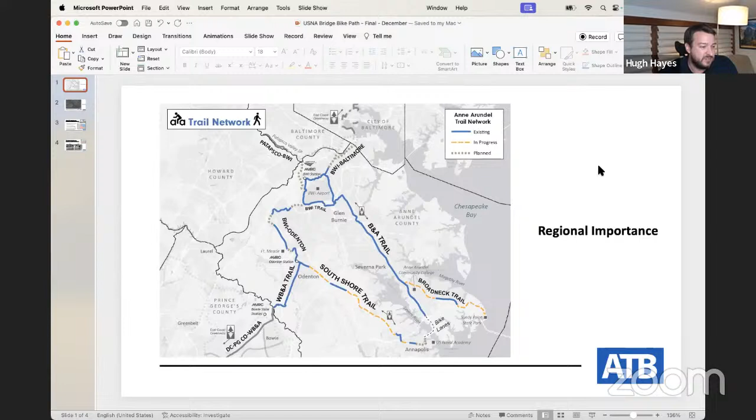Regionally, you've probably seen this map before by Bike AAA, showing the Anne Arundel County Trail Network, what exists today, what's in progress, and what's planned. In a couple years, pretty much this whole map will be done, with a separated shared use trail from Annapolis to Baltimore, or Annapolis to Odenton, and down all the way to Washington, D.C. The only problem is that bottom right corner near Annapolis, where it's just a dashed line showing bike lanes, which is what we're going to talk about today.

Why this is so important locally is that Annapolis is investing in a bike network, and this 450 segment really ties into almost everything Annapolis is doing. From the 450 segment, there's a section of trail going from here to the Naval Academy Stadium, then the College Creek connector off the 450 segment that takes you into downtown. From there, the West East Express trail will take you from Odenton to Parole, and all the way to Washington, D.C.

Annapolis is very close to the B&A trail, but today it's very hard to get to the actual B&A trail safely. Thankfully, Anne Arundel County is planning a shared use path on the east side of the bridge that will connect where the terminus is today. The Navy is also thinking about doing something at the 648 segment, connecting their base on the other side of the Severn River to the Naval Academy.

So from the regional to the local, this segment of the 450 is vitally important to everything we're doing, and it would be a huge missing link if it wasn't there.

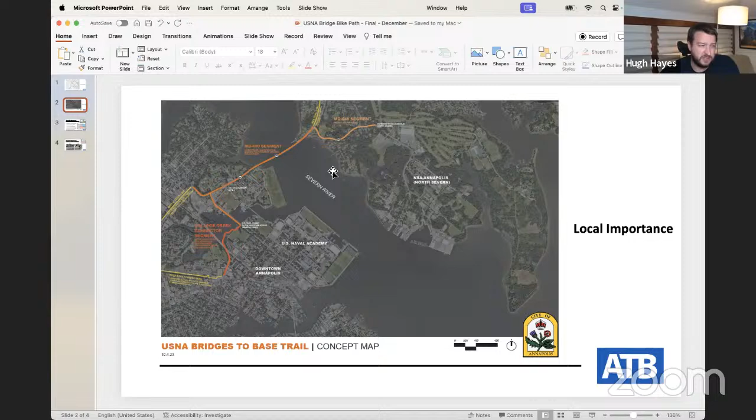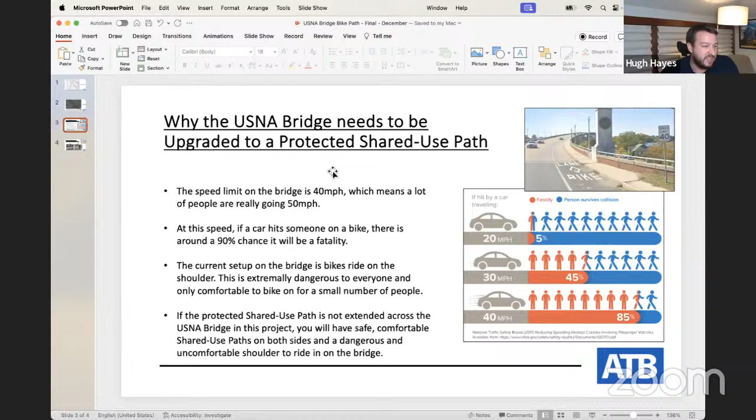The two things we were looking for in this project were: one, that the scope included the bridge itself, and two, because of the 40 mile an hour speed limit on the bridge, that it be a protected shared use path. According to the National Traffic Safety Board, at 40 miles per hour there's an 85% chance of fatality in a crash, and there are downhill sections where people likely go even faster. So we don't believe flex posts alone would provide enough protection from a car veering off the road into the bike lane, which would most likely result in a fatality.

So the second thing we were looking for, besides the scope including the bridge itself, was something with a higher level of protection, a hardened barrier, something like in this picture, a sort of tall curb.

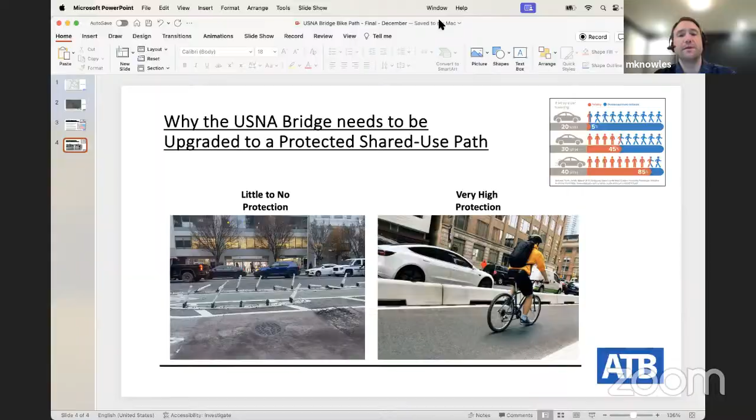Yeah, sure, I'll touch on all those things you're asking for, and we'll definitely have time for questions afterward. I'm Matt Knowles, I'm with SHA, the project manager for this project. I'm joined by Luis Gonzalez, who's the assistant division chief for ICD.

Give me a second here, and I will share my screen. Luis, is there anything you want to say before I pull this up, or are you pretty good?

Hi everyone, I'm Luis Gonzalez, Assistant Division Chief for the Innovative Contracting Division and Fund Manager for Fund 88, which this project is under. To us this is a pretty important project, and we've been investing a lot of resources on it.

I believe Zoe talked about this project in one of your last meetings. We are just trying to make sure we provide the safest accommodations we can within the constraints we have. We're not saying any ideas are bad. We want to put in as much of the safest infrastructure as we can, but we're also constrained by what's existing out there. I'll let Matt present what we're able to do so far, but overall I want to make sure everyone understands we're all working toward the same goal: to provide safe infrastructure for everyone.

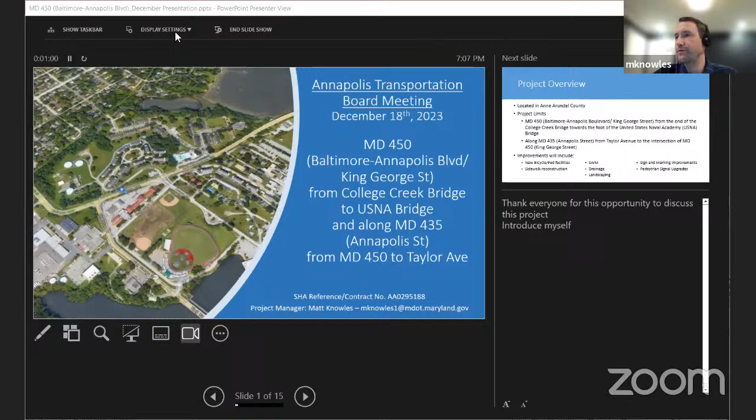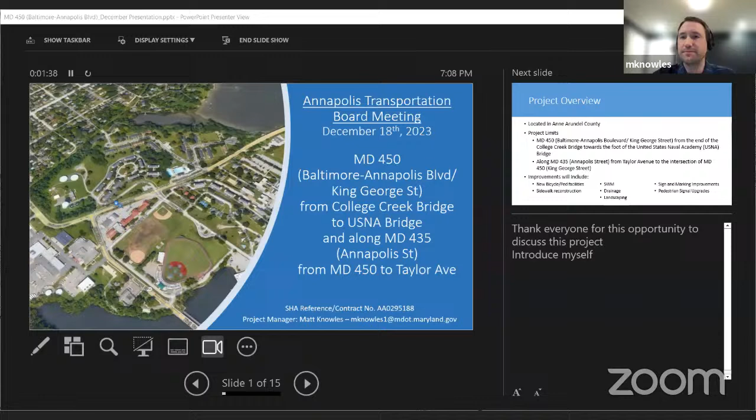Just trying to figure out if I'm sharing the right screen, if I need to switch them. Do you guys see it now? Yeah, your title slide's up, Matt. Give me one second, sorry, I'm used to Teams, not Zoom. Can you full screen it? Let me check the display settings, swap the screens. There you go, is it working now? Yeah, but can you full screen it? How about now? Yeah, that's great. All right, sorry about that.

So you can see it's the Maryland 450 project, from the College Creek Bridge to the U.S. Naval Academy Bridge. There's also a section along Maryland 435, from King George Street to Taylor Avenue. Taylor Ave is right there if anybody's not familiar, and King George Street is here. So here's a little section of 435 that's also part of this project.

As I said, I'm Matt Knowles. My email is at the bottom of this slide. If anybody has any questions afterwards, feel free to shoot me an email.

So, project overview: this is in Anne Arundel County, and we just went over the project limits. I want to touch on this — these are the approved limits thus far. We'll talk about some options for including the Naval Academy Bridge, as well as some improvements to the College Creek Bridge, that we'll see here shortly.

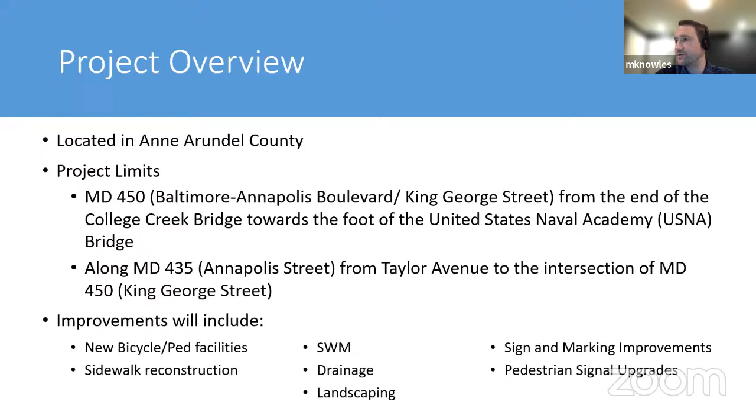Luis mentioned this falls under the programmatic objective statement for Funds 79 and 88. So what does that mean? We're trying to accommodate bicycle and ADA pedestrian facilities along this project. We want to improve existing sidewalk segments, ramps, and crosswalks in the area that don't meet ADA guidelines. We want to serve current pedestrian and cyclist demand, as well as prepare for a volume increase in the future.

We'd also hope to enhance the trail network and community connectivity — something Hugh touched on at the beginning of this meeting. Hopefully we connect Annapolis to Crownsville, Odenton, Arundel Mills, and all the surrounding areas. He also mentioned this corridor is part of a larger spine of bicycle networks, including the East Coast Highway, East Coast Greenway, American Discovery Trail, and Grand History Trail.

And these improvements would also help bridge the gap between the B&A Trail, the South Shore Trail, and the U.S. Naval Academy Stadium Trail, as well as the proposed College Creek connector. And finally, we'd also want to address any known safety issues for all vulnerable users.

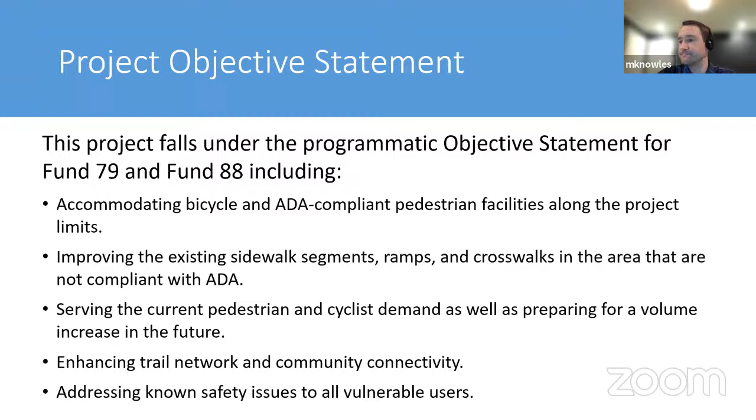Talk about funding real quick. This project is fully designed, fully funded for design. It has federal funds approved, as well as Anne Arundel County match. And it is planned, funding is planned for construction, which means it's considered within the program budget. We just would have to get NEPA approval to access those federal funds.

And while we're looking at these alternatives, any changes that were made to the project limits would need to be cleared by the administration. And that determination would happen at 30% design milestone, which we are working towards. And that decision would be based on the feasibility of the design as well as the cost of the alternatives.

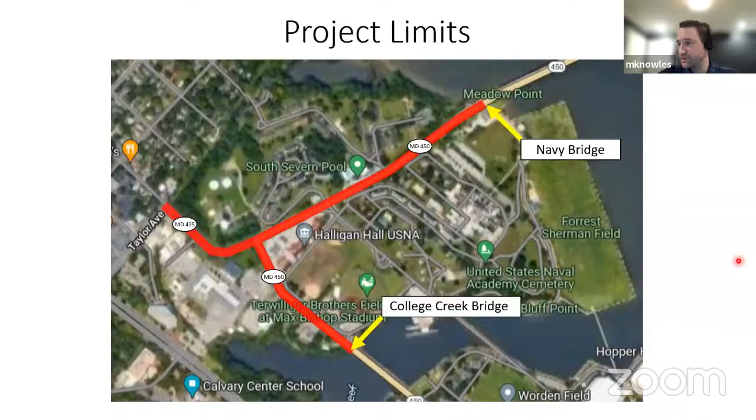I just want to touch on some existing conditions, most of which you're probably already aware of. But this is considered an urban center, which means we want to focus on safety, accessibility, and quality of service. The posted speed limit through the limits is 30 miles per hour. I know Hugh said over the bridge it is 40 miles an hour.

Maryland 450 has existing sidewalk on both sides, which would be upgraded and improved to meet ADA standards. Maryland 435 has sidewalk only in the eastbound direction, and most of that sidewalk is not ADA compliant. There are 2 bus stops along this route which do not meet ADA standards, which we brought up to meet those guidelines. And while there is some existing bike lane signage on both of these roadways, there's no shoulder or bike lanes connecting them all, so there's not a congruent bike travel way for anyone.

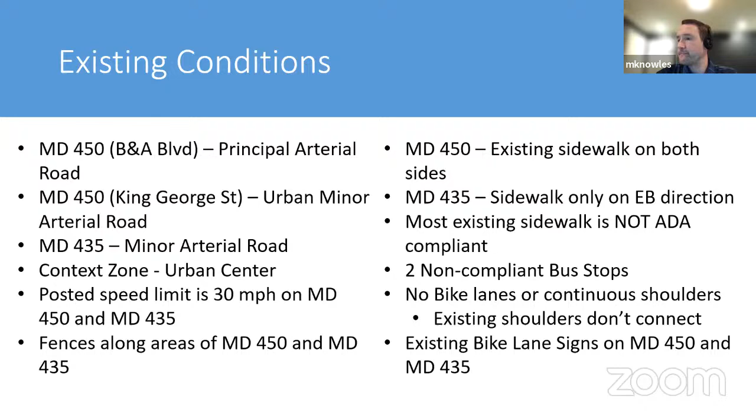So when we started this, we had a number of different alternatives that we were looking at. SHA produced a number of alternatives that were sent out for comment from the county and the city. Based on those comments, we revised it down to 2 alternatives to examine, as well as 2 alternatives proposed by the city of Annapolis, which expanded on the original project limits to include the Naval Academy Bridge and the College Creek Bridge.

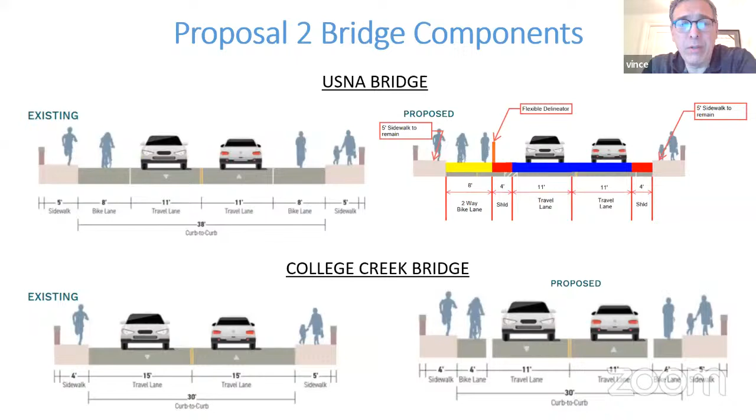Anyone else? Matt, would you mind describing, since it might be part of what's coming up anyway, how the access works for the two-way bike lane at the Naval Academy Bridge? On your previous slide, you show what appear to be two new cross points at the intersection of 450 and 435. Right here? Yeah, so what happens there? If I'm on 435 eastbound heading to cross the bridge, will there be new lights or signals?

Sure, new striping, new ramps, for this entire intersection. So you're saying if you were coming down this way and you come to this intersection, how do you get over to here and up and out? Will there be changes to the light signals? Sure, to the traffic signals themselves.

Timing-wise, if I'm going eastbound and the lane is on the north side, I have to cross traffic twice, right? You'd have to cross here and then here. Yes, you'd have to, right. You have to cross King George and then 450 going this way.

And then, I don't want to get too far ahead, but on the other side of the Naval Academy Bridge, is the intent to have a two-way path all the way to Bolter's Way, or whatever that road is that connects to the bottom of the B&A Trail? So that would not be part of this project. That would be a separate project for sure, well outside the scope of our project.

So I know that's something being looked at, but would that just be counterflow at that point, or would I be expected to cross back over to get eastbound again on the other side of the bridge? Yes, you would be crossing over and go along the existing side. I guess there's a shoulder there, right, that you use. I don't think I have a slide that shows that, but I know what you're talking about.

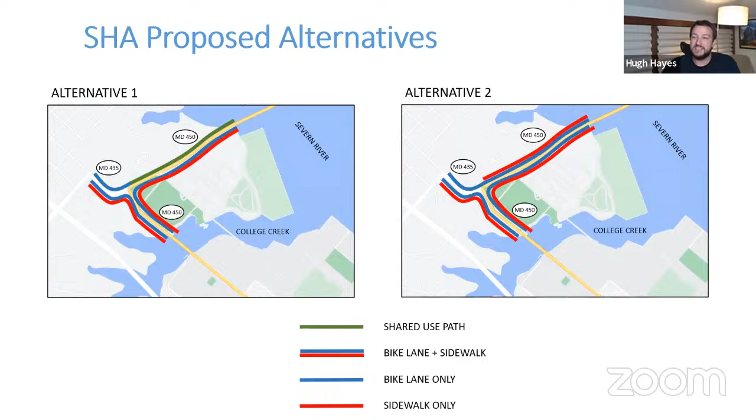I don't—I mean, I'd seen it. Sorry, I think these were the only two proposed by the city. Okay. Is it possible to do that? I feel like it's a slight variation, but then you don't have two crossings; you only have one.

Vince brought it up, and you and Vince are both right—that would make a lot of sense. There is a big hill there, though, but that would make a lot of sense rather than having to cross the street twice. If it just extended—you're talking about extending this? No, not even just—10 feet further, and then cross south instead of crossing south where it is right now.

So there's no—you're not going south and then west. Is that what you're saying, Hugh? Yeah, just go south. You don't have to cross the—there's two crosswalks shown that make an L in the drawing. You're saying if there's two north-south crossings, right?

That L should just be flipped to the other corner. Correct, that's what I'm saying. You want this? Oh, it's hard to see with the cursor, but over here. Yeah, so then you can avoid having to cross the street twice.

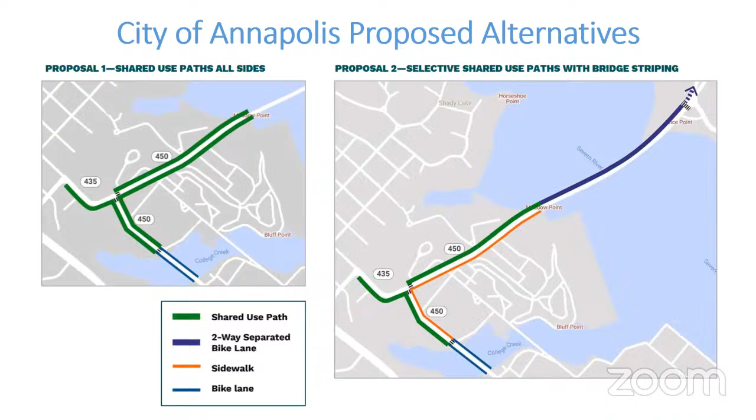When you see the left turn only, those people that typically work for the academy are scrambling to get through that intersection to get to work in the morning, there is quite a bit of left turn happening there. And if you eliminated that one crossing and made it on the far side of the light, that probably would be a large safety enhancement.

Right, the other side of the light, further west of the light. Yeah, about 50 feet. So the majority of the traffic coming west from 450 and taking that left turn to get into town, which is an enormous amount of traffic, you would not interfere with that, and you would eliminate a safety issue quite a bit.

Luis, is there any reason you could think that we wouldn't want to do that? The crossing, yeah, I mean, I don't see any reason why not. That's something we can look at. Yeah, perfectly reasonable to me. If you're trying to eliminate crossings, the less crossing events we have, the better it is.

Sure, we can study that. We can definitely, yeah, we absolutely can. Even if it requires a retaining wall, that's not the end of the world. I don't think a retaining wall in that section is going to kill the budget. No, I agree. It's not, I mean, if it's for safety, that's easy to justify.

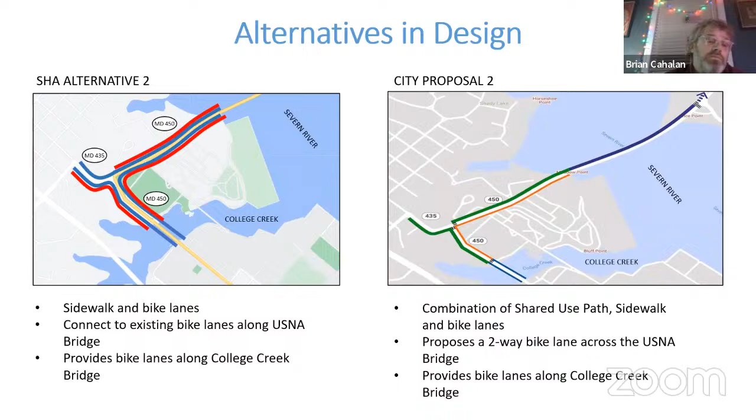Yep. All right, where are we in the presentation?

Just going to go over the schedule as of right now. As Luis said, we're not even to 30% design here. So we have the two alternatives that I showed in the presentation, and those we're working towards a stormwater review the beginning of next year.

We also are in the process of bringing on a new design consultant. The consultants that did the design.

How are you? Everybody else is fighting. I'm on a fucking Zoom meeting. That was me this morning, I was trying to duck hunt in a meeting. Hey Charles, you might want to mute there. There we go. All right, don't they know that we're in a fucking meeting?

So I was saying we're also in the process of bringing on board new designers. The designers that did the work up to this point, their contract has run out, so we're anticipating bringing them on board early in 2024, and they will continue on with the 30% design into the spring, 65% by the end of 2024, early 2025 90%.

Fall of 2025, advertisement late 2026, and construction—I think they should say 2025, sorry—construction in summer 2026. This is just a tentative schedule, just to give you guys kind of an idea of where things stand.